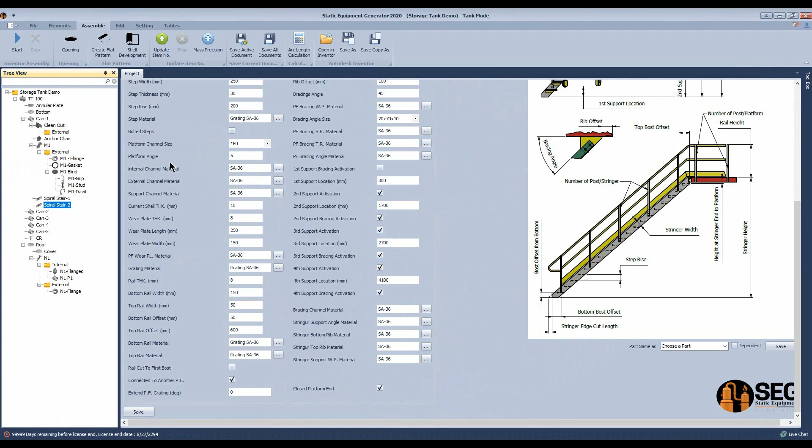In this part, inshallah, we will make some detailed drawings and make the flat pattern drawing for the roof and shell plates. Now from SEG Software we will select the roof, and from update plates we will select create flat pattern. Here, after selecting this, SEG will start automatically to create the flat pattern of the roof.

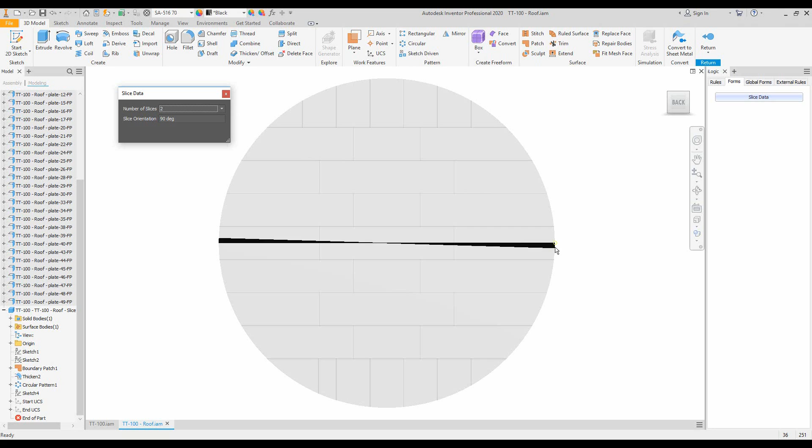Here, that's the last piece, which is the slice cut angle. If we double click on it, and from the iLogic browser here, you have the ability to make this slice from 2 pieces, and you can figure that this value shall be divided into pieces. And if you make it 4 pieces like this, you have the ability to control the angle of the cut like this. Let's keep it on 90 degrees.

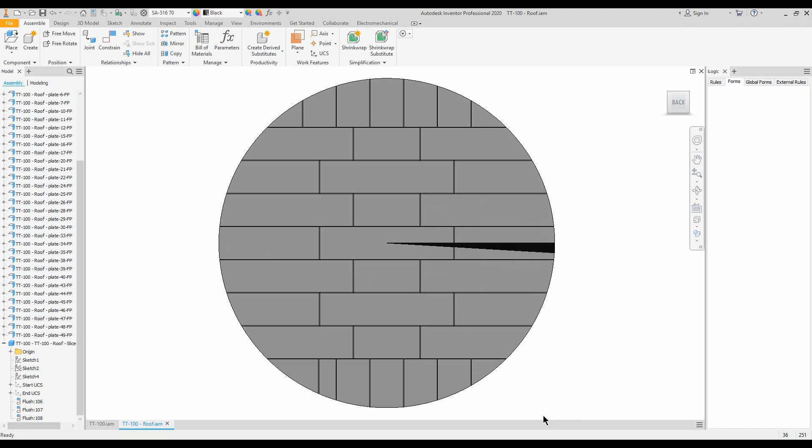Now we will make a drawing for this flat pattern. From here we will select drawing and create drawing. Select the drawing size, and from the orientation we will add the elevation view, and from here we will look from the front view. So if we take that like this, we will make it from the back view. The location in X and Y, define the scale, and from tables we will select bill of material table, and from here we will select some welding details.

So let's come back to the end, and from here we will select this detail, that one, and that one. That's a detail for overlap, and let's click OK. And from here we will move, flat pattern, drawing number, revision, okay, click save. Let's delete this. Let's add another rows here and click create.

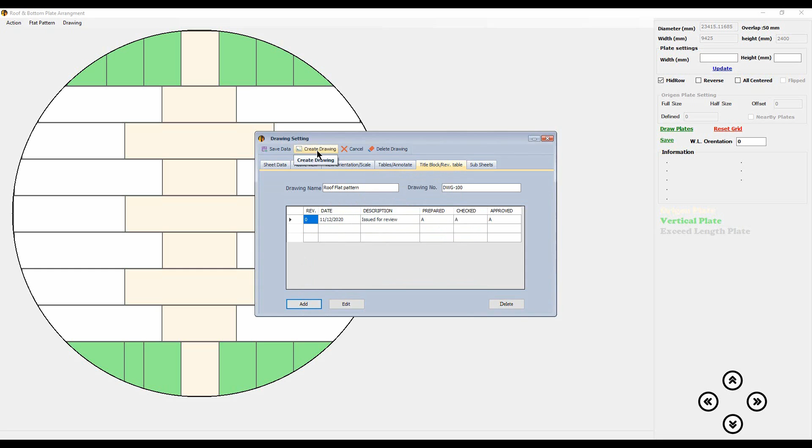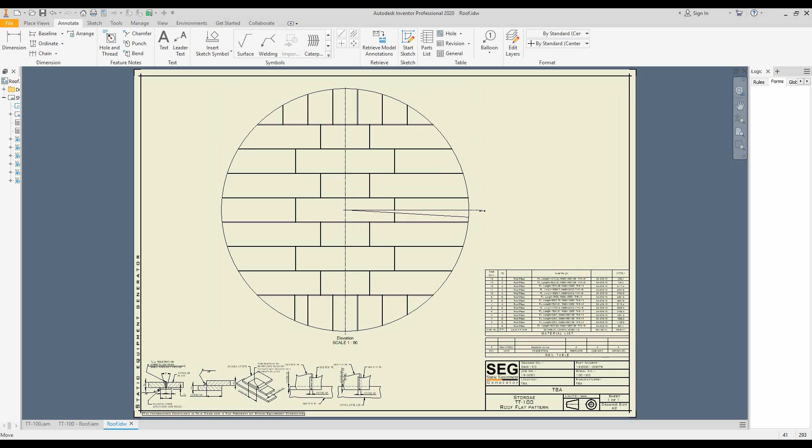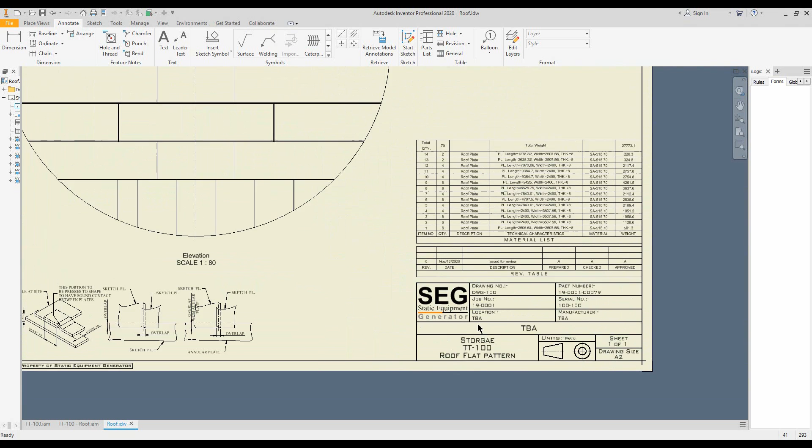Now we will open Autodesk Inventor. You can figure that the view of this roof after flat patterning is done, and here the details. Now we will add some dimensions to the model. That's the center line. That's the bill of material of the roof, and here the information of the project, like the serial number that we defined, the manufacturer, drawing, the storage tank name, and drawing size, and here the revision table.

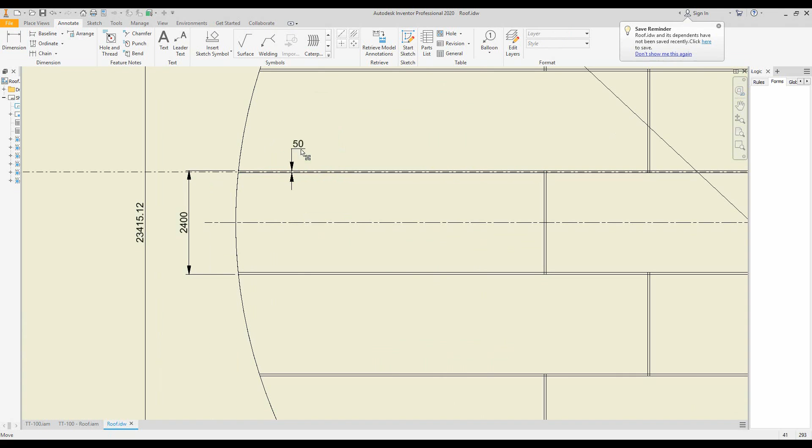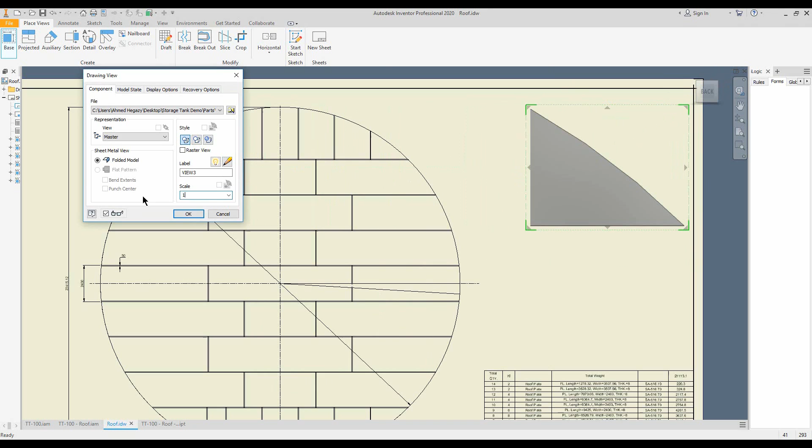Now we will add some dimensions, like the large diameter, or we could add it like this. Okay, and from here that's the mid plate width, that's the overlap. Okay, and if we wanted to make a detail for each plate of those, we have the ability to do it like this. And let's take a look from the back view to be the same here, and define the scale to be like this, and we could add the dimensions.

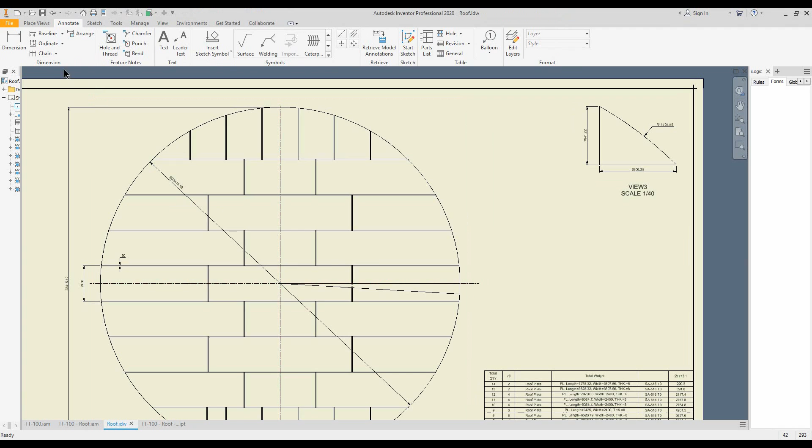Okay, another piece. For example, let's open this one, and from here we will add this piece, and let's take a look from the back view. Okay, like this.

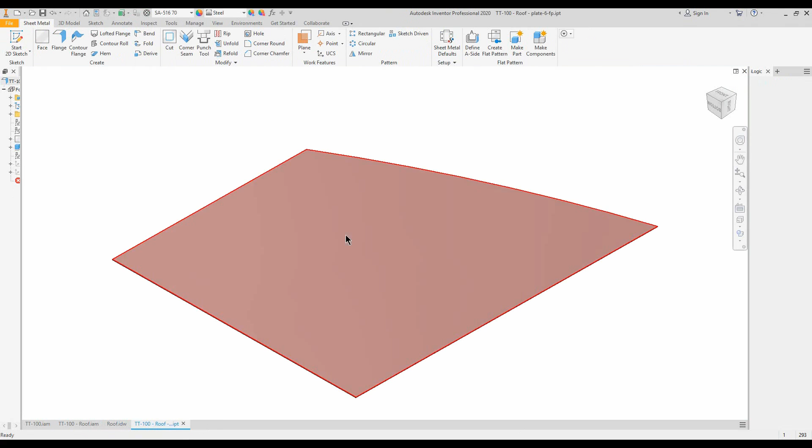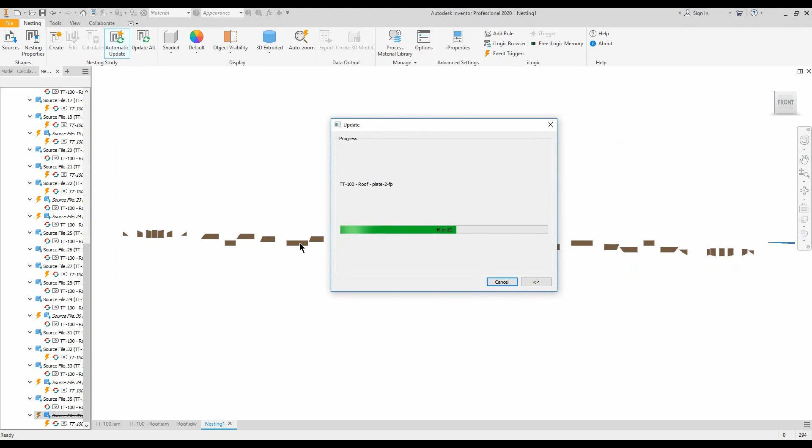Okay, to make a nesting for this roof, we will do the next steps. From here we will select the assembly and select create nest, and from here we will select standard millimeter and click OK. OK, and here we have those plates. From nesting tool we will select the last piece and deselect it, and from here we will define the plate dimensions. Okay, and here and click OK. Now we will make a nesting study and click OK.

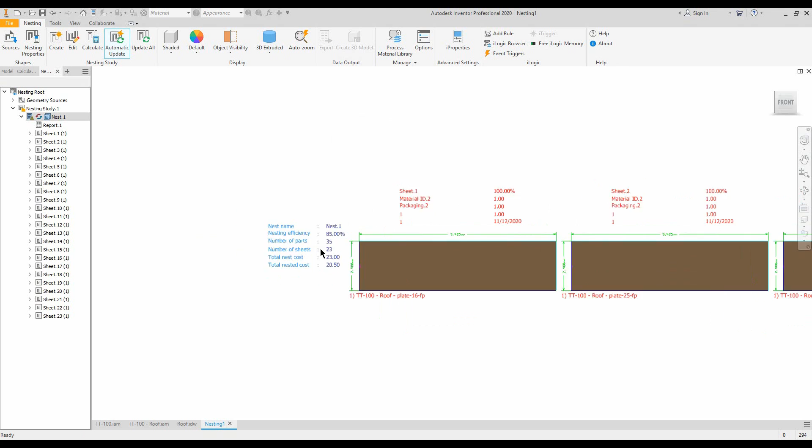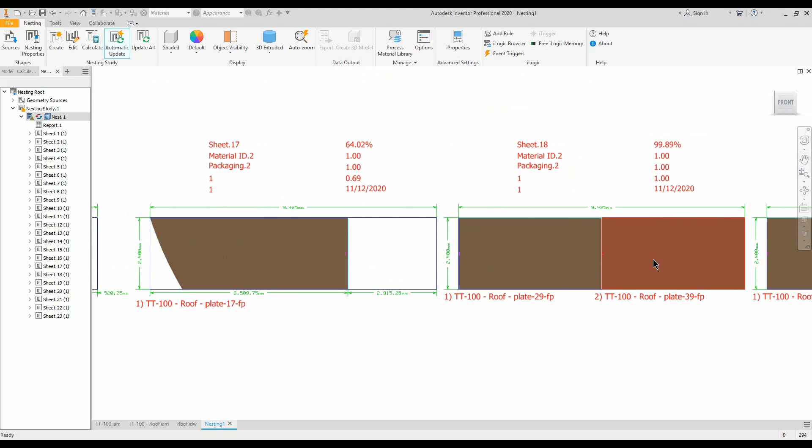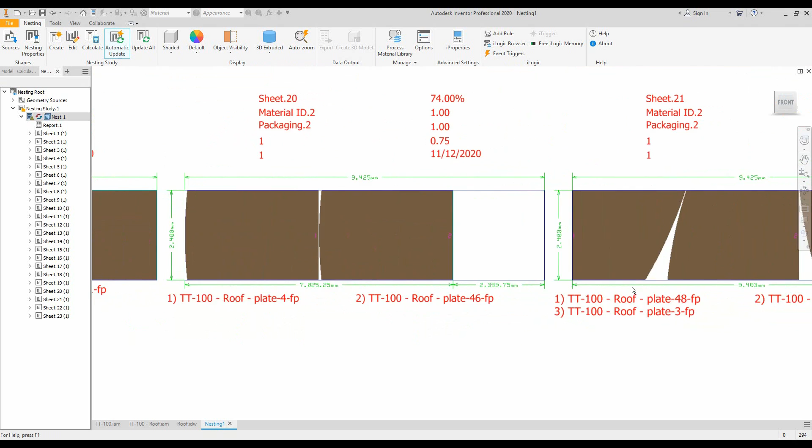Here we have the nesting result, as you can see here. Let's come to the small parts like that, and we have two halves, and you can figure that that's the torch cut tolerance right here. So it should be defined in a correct way in SEG to make the length of the half plate correct in nesting calculation, like this.

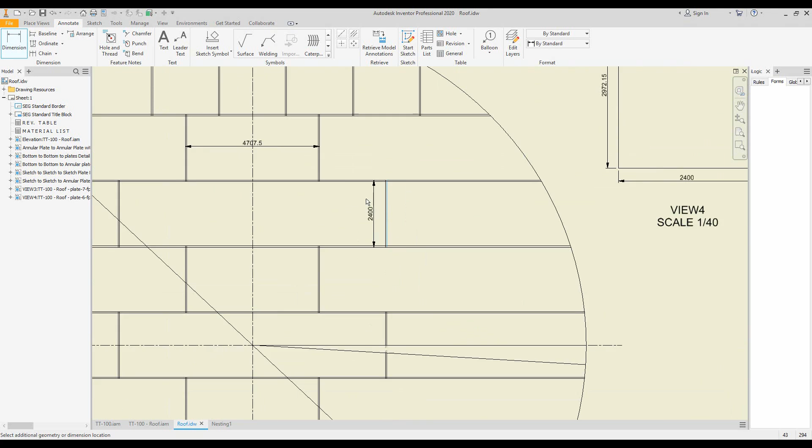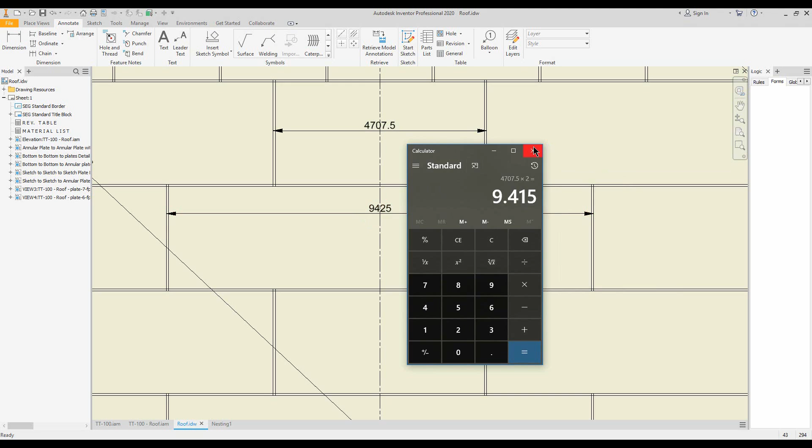Okay, so let's come back to the drawing here, and in this detailed drawing, if we measure the half plate, you can figure that the difference between those, if we multiply by 2, so you can figure that the difference between them is 10 millimeters, which is the cut tolerance or the torch cut tolerance. Okay, now let's make another drawing

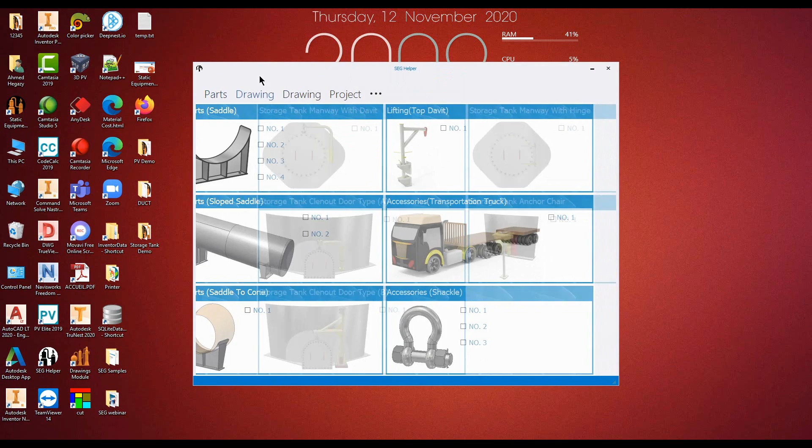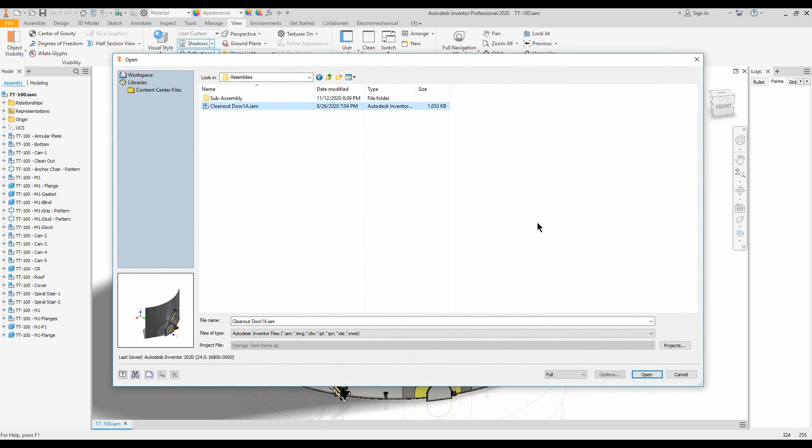for the cleanout door. Now we will use another tool in SEG, which is SEG helper. This helper will help us in some drawings like cleanout door and manway. So from drawings right here, we will select this cleanout door, and from projects we will select the location of the project, which is a storage tank demo, and click create. Okay, now we will come back here and go to the cleanout door and open the assembly. And from the iLogic Browser right here, we will make some modifications to make this one look the same as what we did right here.

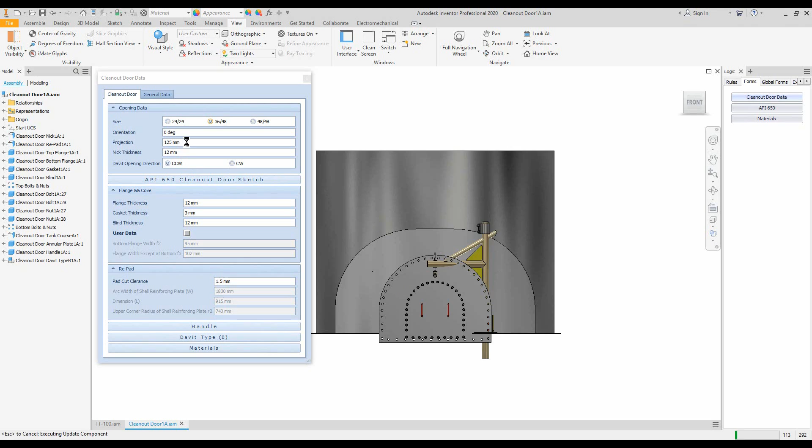So if we come back to the cleanout door, it's 36 by 48. So let's come back here. No problem regarding the orientation and the projection. 175 for the projection, and the neck thickness is 14 millimeters. The flange thickness, if we come back here, flange thickness is 20, and the cover thickness is 24. Okay, gasket thickness is 3, blind thickness is 24, and pad cut clearance, the handle, the length of the handle, davit, dimension of the davit, the materials, and from here we will define the tank inside diameter.

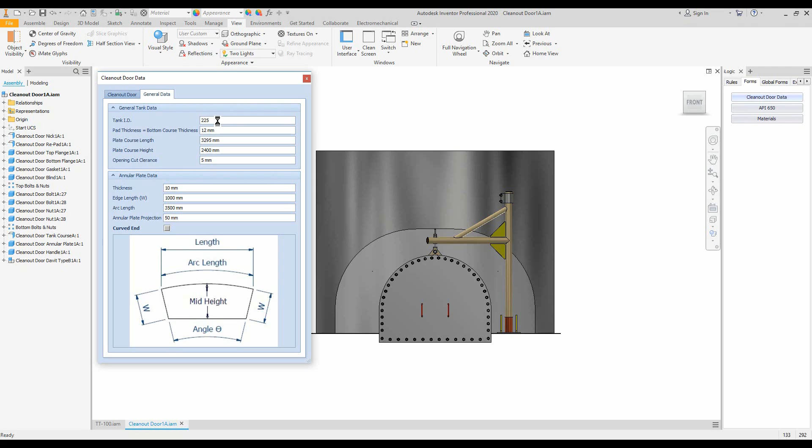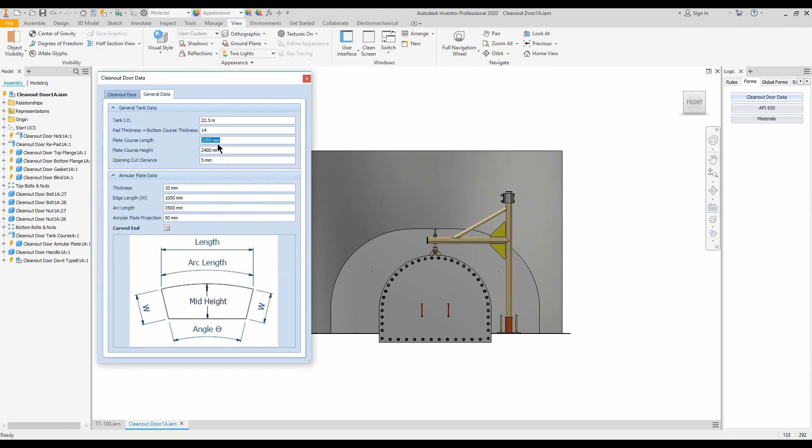Shell course thickness, plate course length, opening cut clearance, the thickness of the annular plate, edge length, arc length, projection,

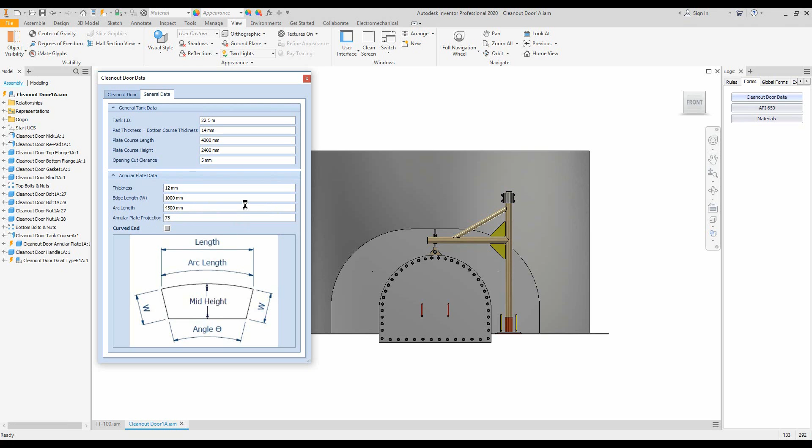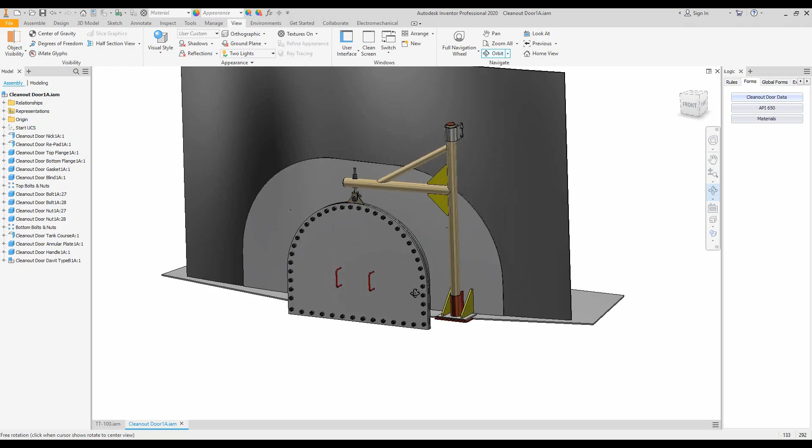here that's it. If we wanted to make these edges curved, we will select this one. So if we take a look, you can figure that this edge is curved, and if you wanted to make it as a sharp edge like this, just remove this checkbox. Now we have this 3D model for the clean out door.

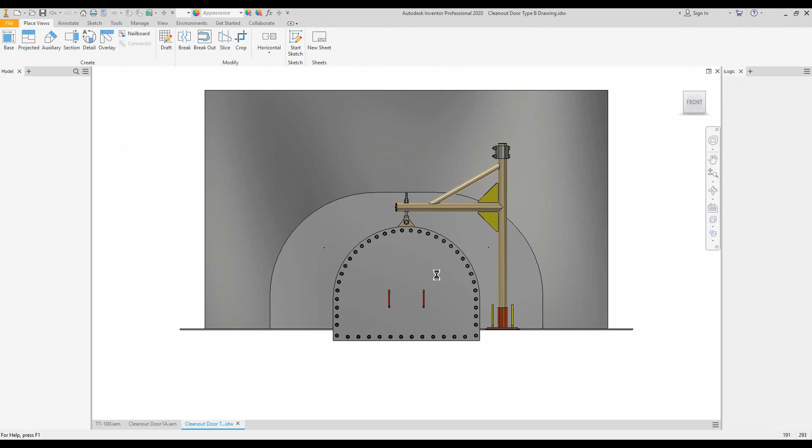Now we will click save, and we will open the detailed drawing for the clean out door. From here we will go back to the drawings and open the detail of the clean out door, and from here you can figure that that's the standard drawing, pre-built drawing for the clean out door, and here that's the IDW drawing. So we will make some modification.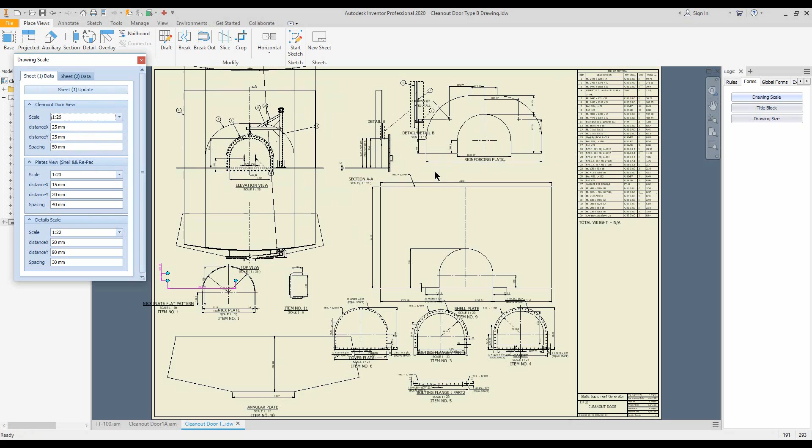From here we will make update sheet to update the scale of details inside this drawing, and let's minimize the scale of those right here and minimize the spacing between them, minimize the spacing or the scale for this detail and for the reband detail.

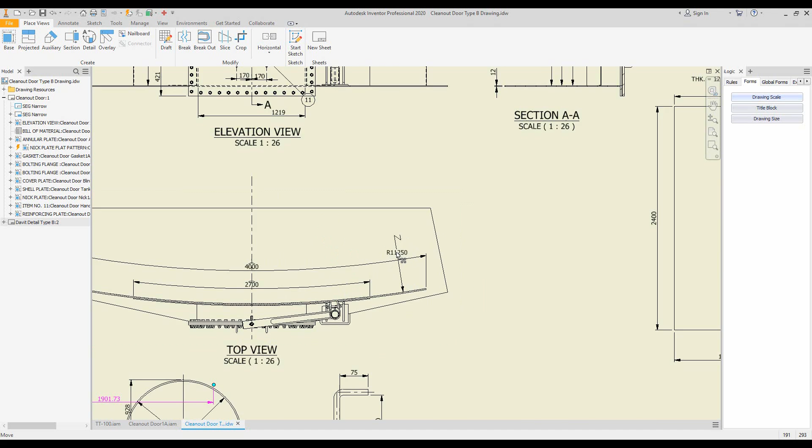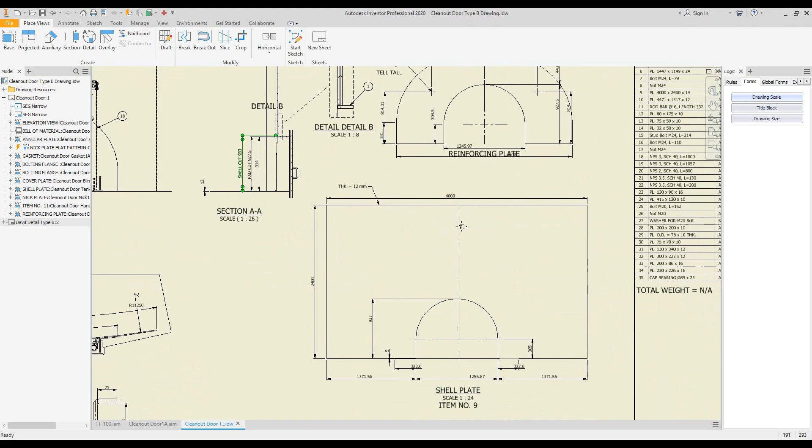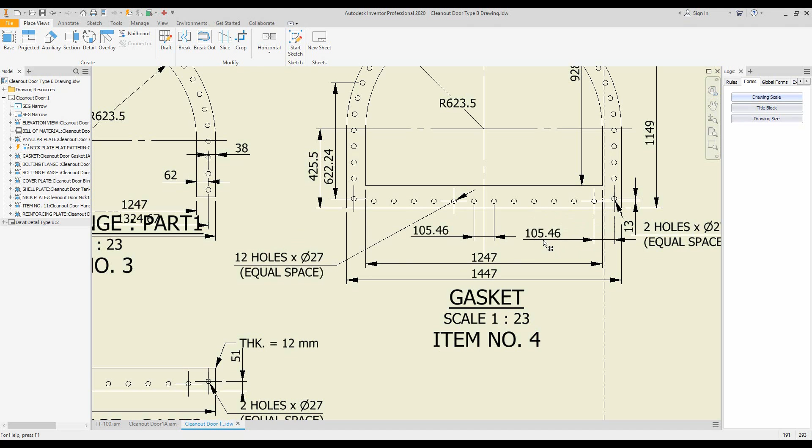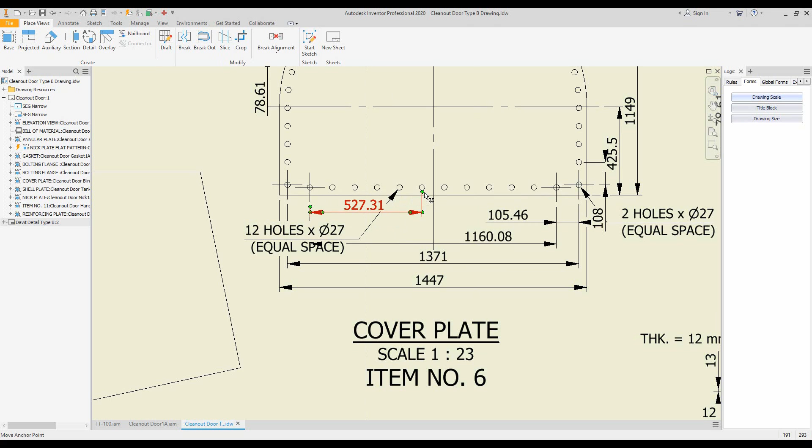Now we will make some modifications by hand, like arrange some dimensions like this to make it make sense, not more or less, like that. The same for the last view here.

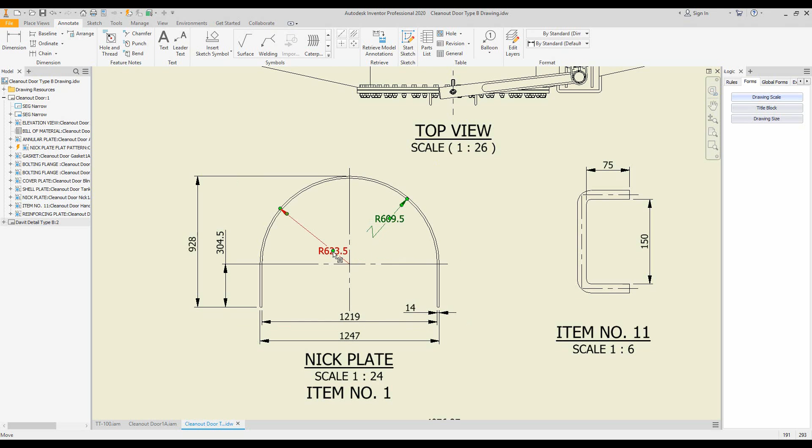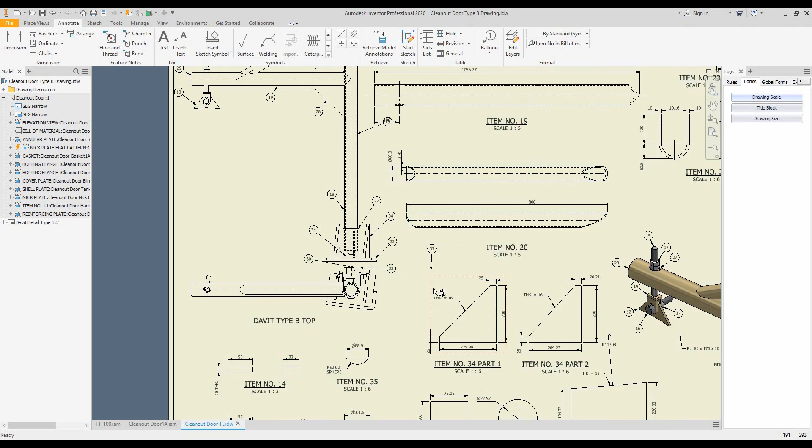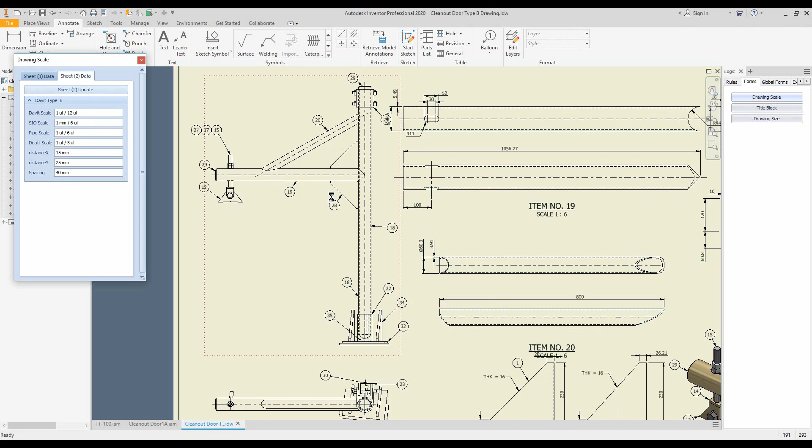Okay, now we will come back to the second drawing of the Davit and make the same adjustment of the dimensions. That's the Davit drawing. You could adjust the scale a little bit, and for the spacing

the total weight and the bill of material. Now we will click save. Now we have those detailed drawings for the clean out door and the clean out door davit.

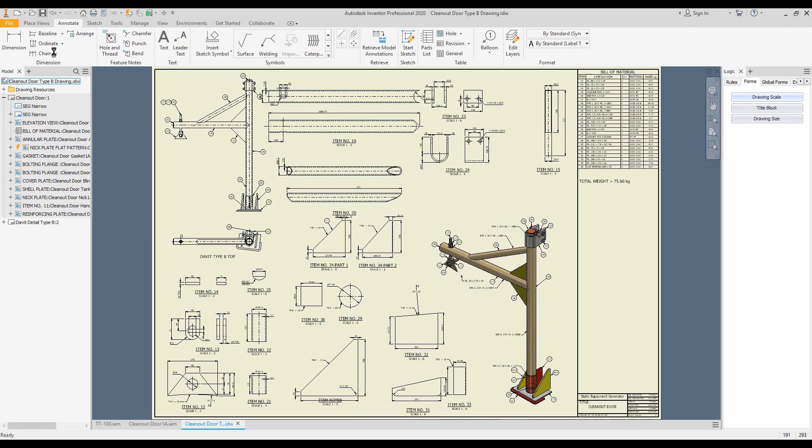Now we will make the sheet metal flat pattern for the shell, which is called shell development. From here we will select this one on the tab on the assembly shell development, and you can figure that that's the shell development for each plate, and those are the shell courses here, from CAN 1 at the bottom up to CAN 5. Now from here we will create the flat pattern by clicking on this button and come back to the model.

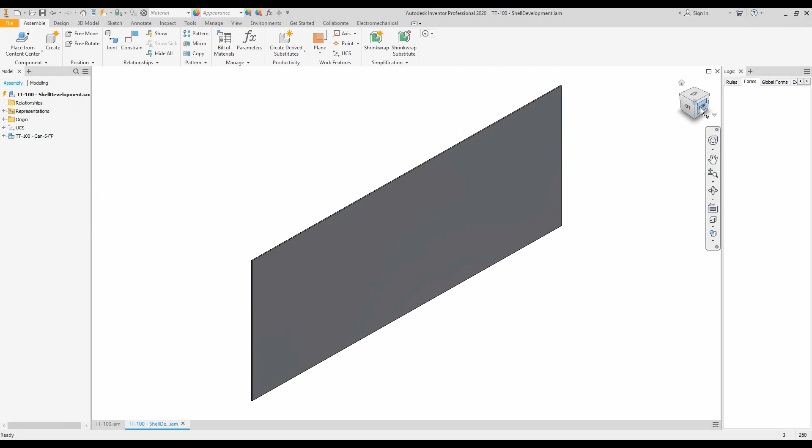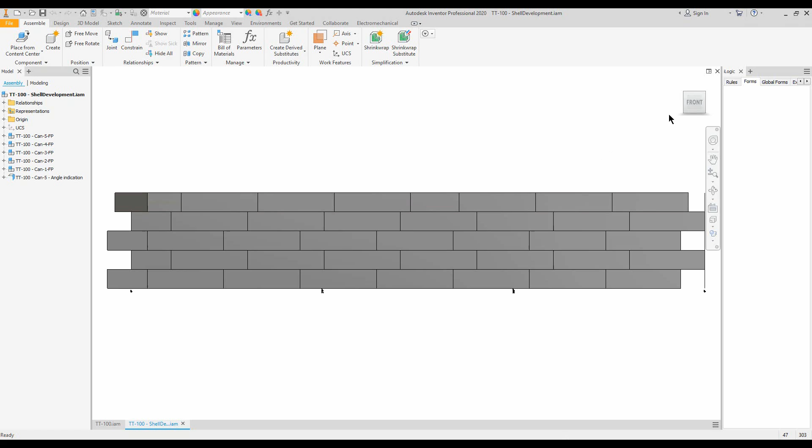Now we will create the drawing for this one. From here we will select drawing and select create drawing, select drawing size and the elevation. From here we will take a look from the front view. Okay, so let's take a look from the front view, find the location.

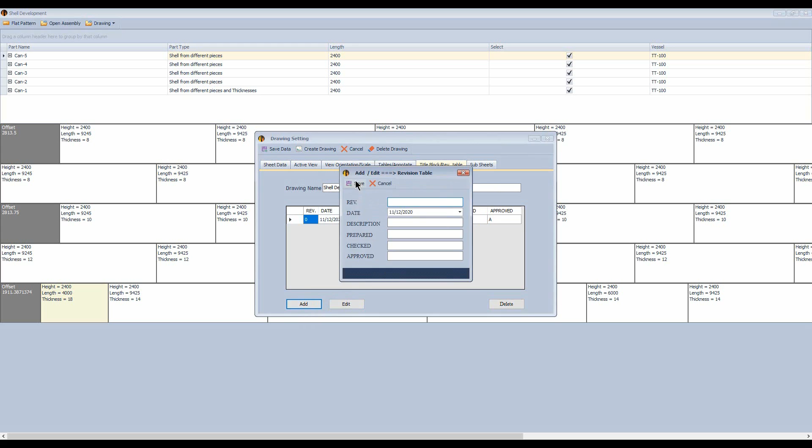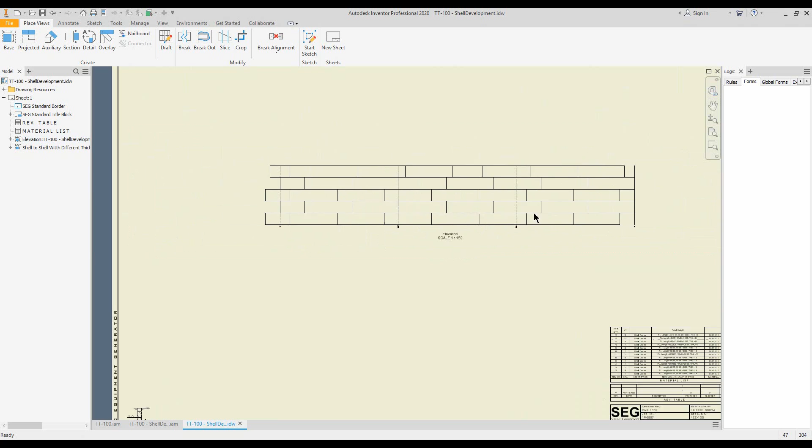So here, as you can figure, after creating the shell development pattern, that's the arrangement of the welding lines from 0 degree up to 360 degree right here, and you can define the height of each course like this.

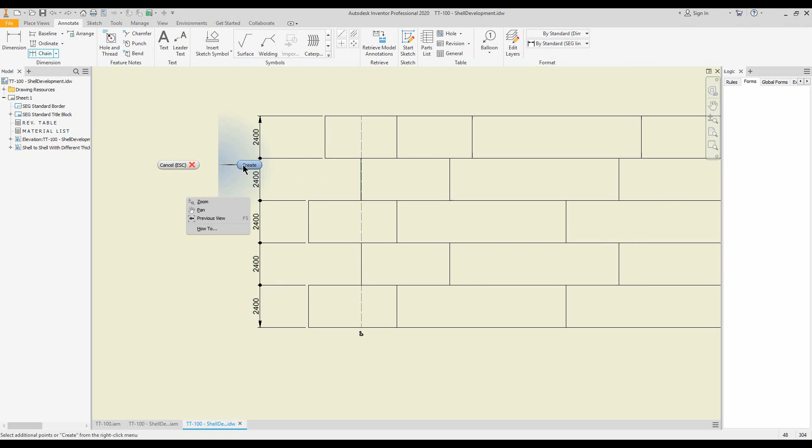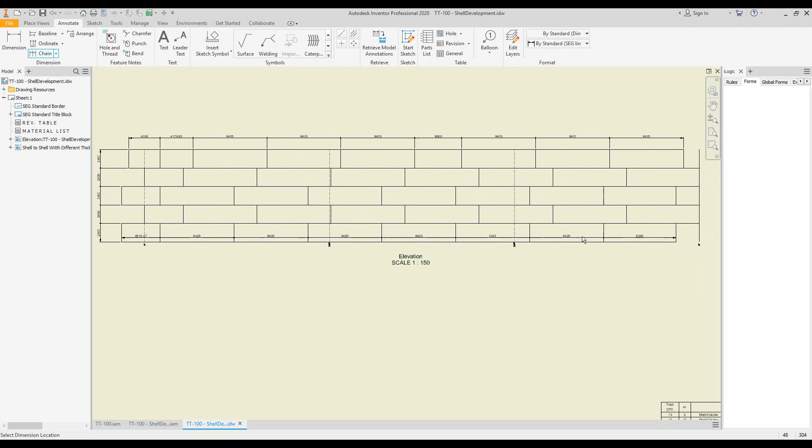So if we need to make it as a chain, from chain we will select this one, and if I continue to make it like this, and if you want to make the same for those, it will be like that. So if you wanted to make it for any level, you can make it easily like this. Okay,

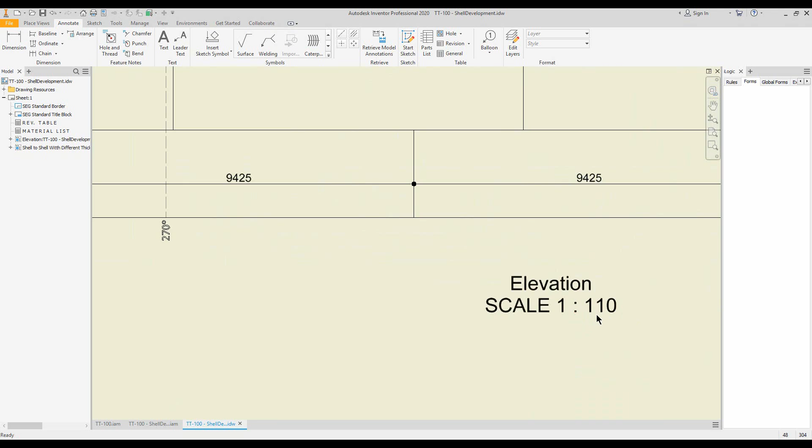and you have the ability to change the scale. If we come back to the drawing and click edit from here, we can increase that one and change the location. Let's click create, and you can figure that the scale is changing 1 by 110, and that's the bill of material. And you can change the scale or the size of the drawing from here if you would like to change the drawing size.

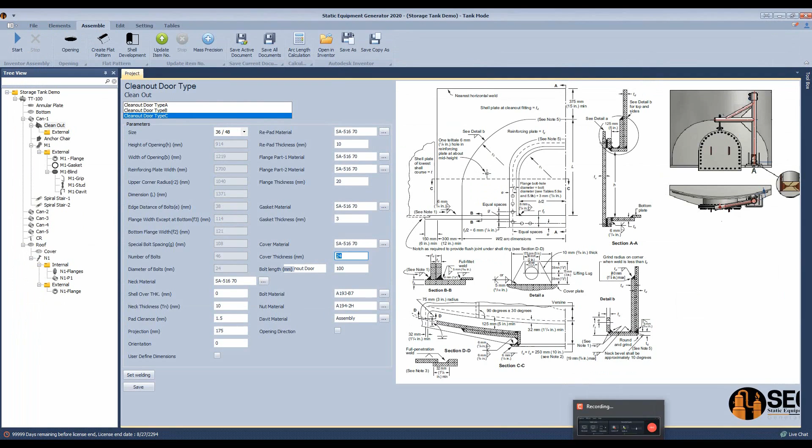Now we will make the general arrangement for the tank. So from here we will select the tank and select create drawing, and from here let's select the drawing size and the views. Let's select the elevation view and the bottom view and define the spacing between them. And the elevation, we will look at it from the back view, and from here we will define the location of the view.

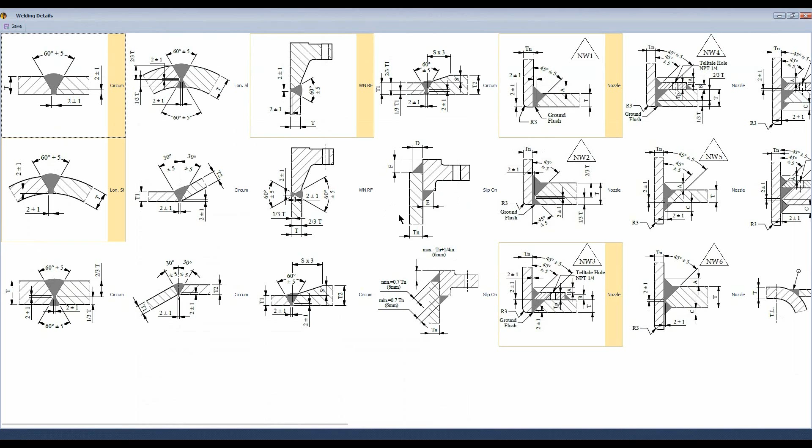We will make the bill of material appear, design drawing, flange table, and nozzle table. We haven't fitting or something like that. Notes, if you want to add any notes, you can add, edit or delete from the standard. Select some standard welding details from the library. Client document list and vessel document list, revision table,

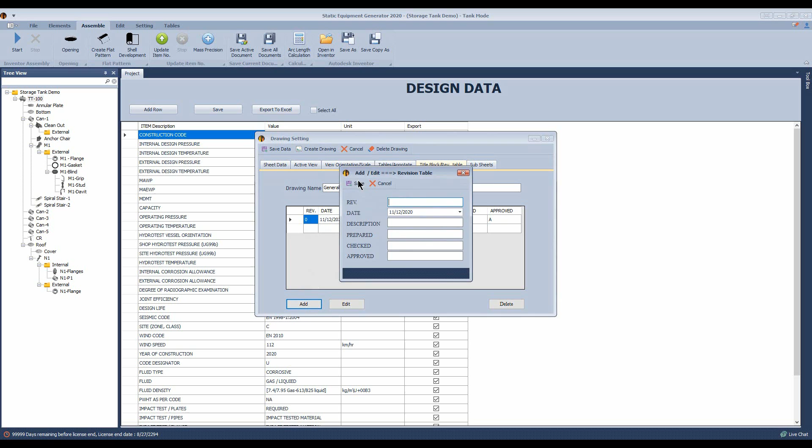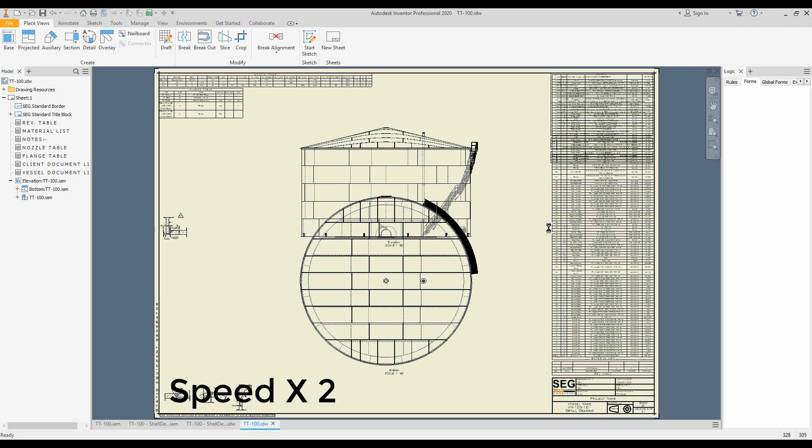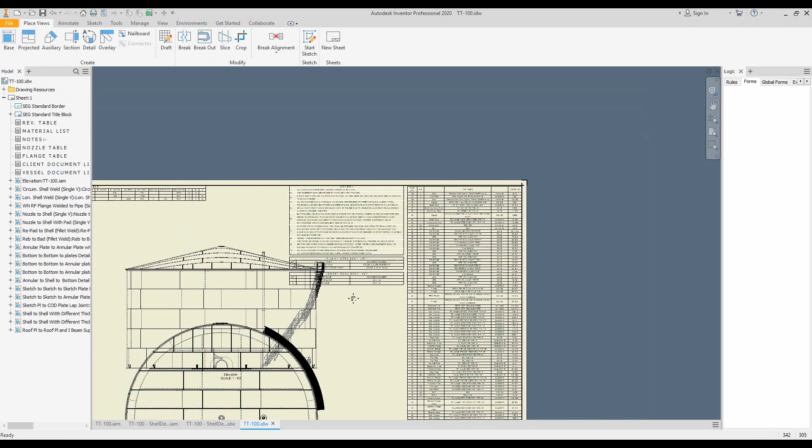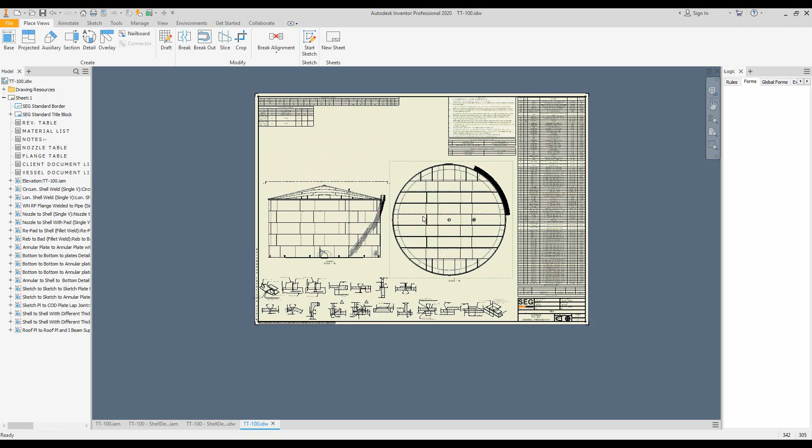and now let's click create. Here, after importing the information, we will move some tables like that from here to there. Okay, and we could make some hand modification. Let's break this and move that one right here, so we have the elevation beside the bottom view, and here we have the welding details, and we could move them a little bit like that.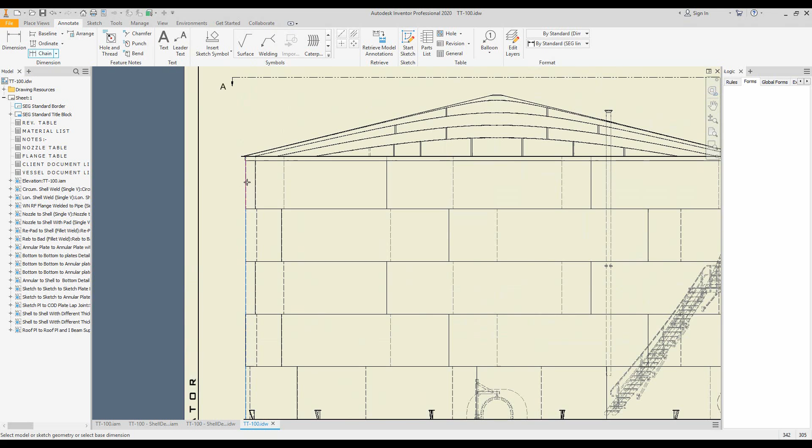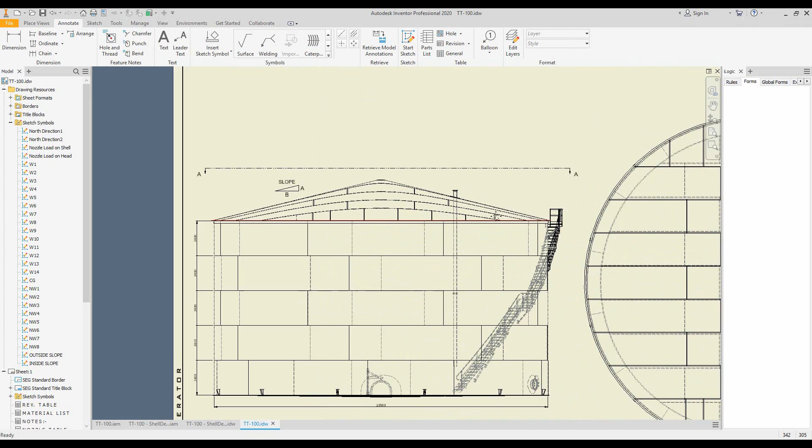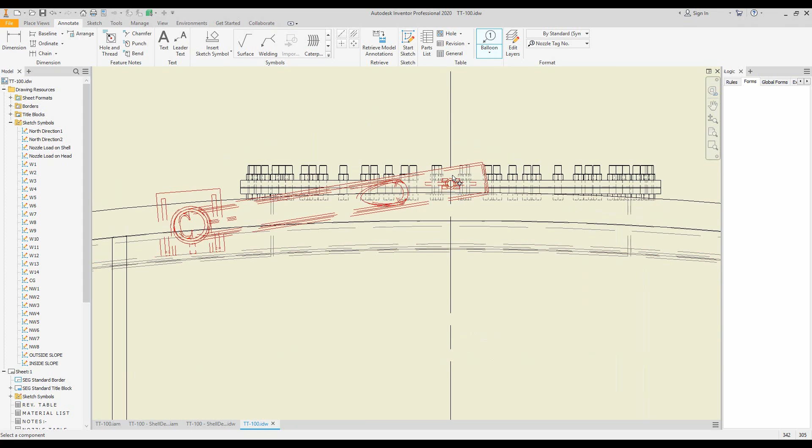And from here we have the ability to add dimensions, chain dimension for the height, continue, and for the inside diameter of the tank, okay, we will get some standard to that. And clean out door. That's the other nozzle, which is N1.

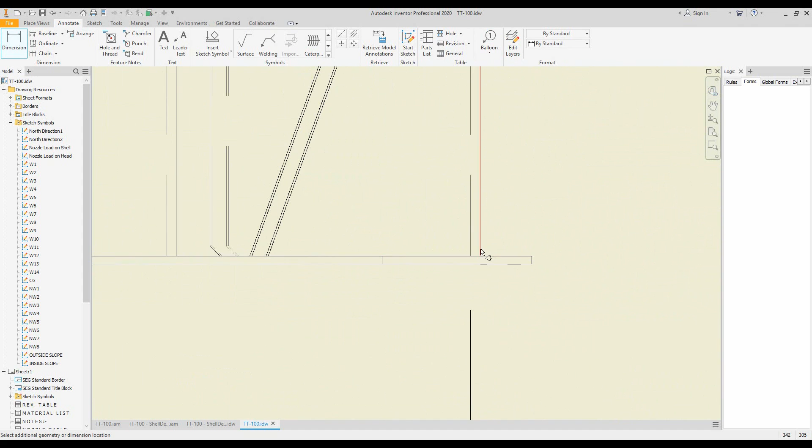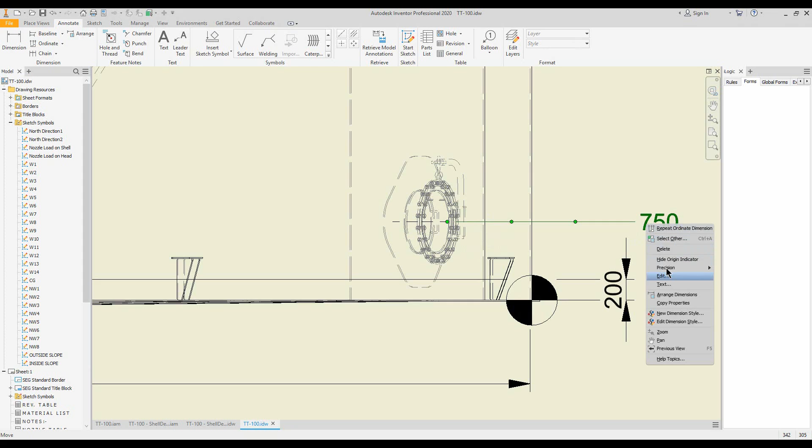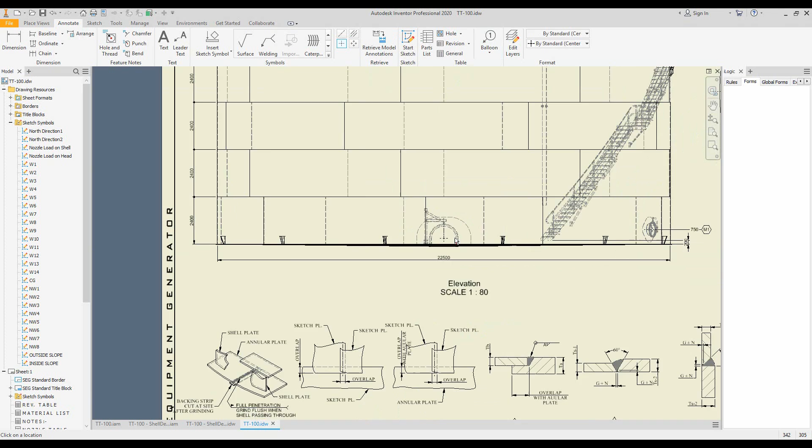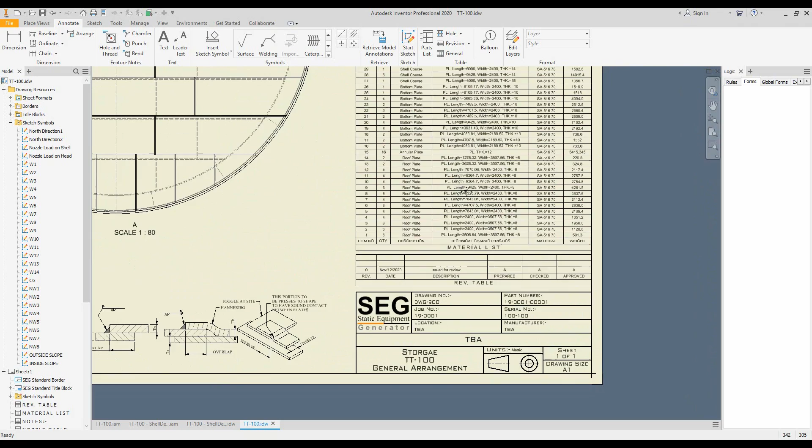The elevation for this nozzle. The projection. So you have the ability to add your dimensions, and by using SEG you can get the automated bill of material in minutes, general notes, client document list and vessel document list.